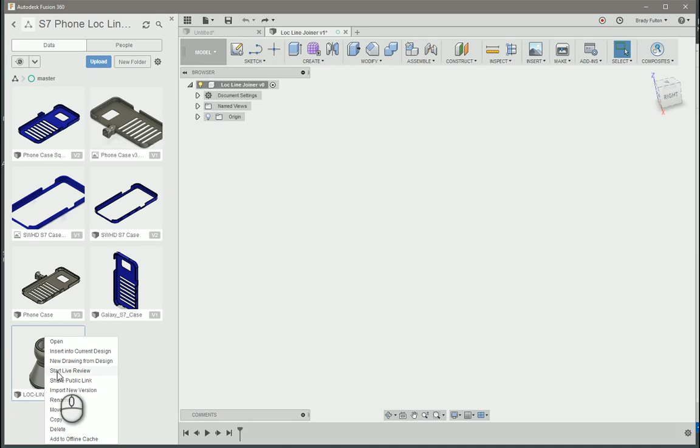Okay, so in here in Fusion 360, I downloaded a 1/4" LocLine from GrabCAD. I actually did it for this phone case originally, but we'll just drop that in there. And I've measured this previously, so I know it does match the dimensions of the actual LocLine.

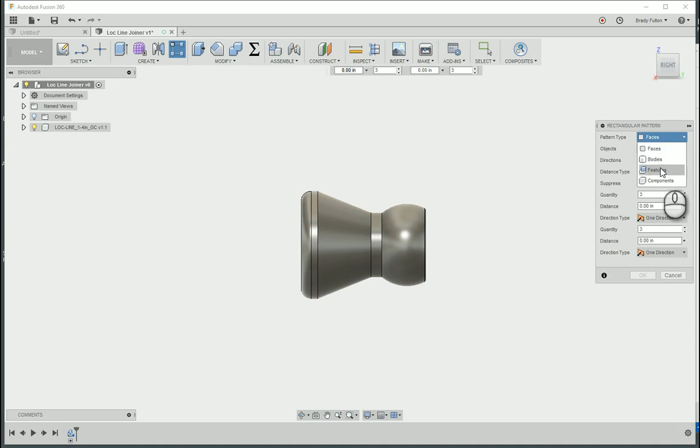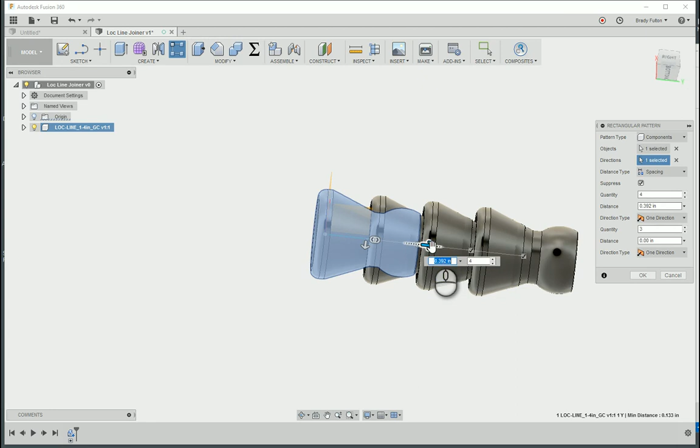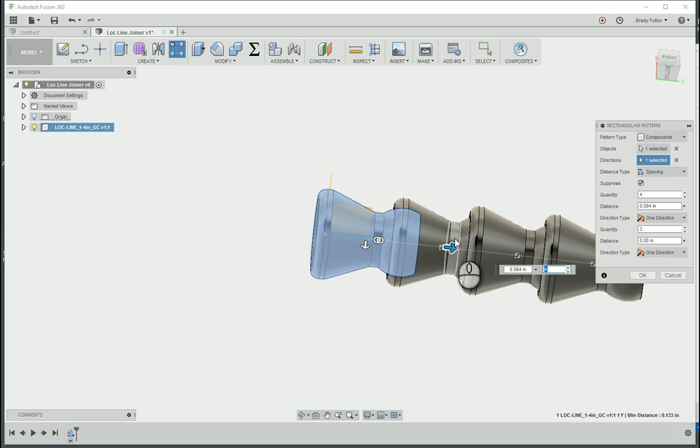So what I'm going to do is go ahead and actually create a pattern here, a component. Let's get my component, do it in that direction. How many do I want to make? Let's do 4, we'll do spacing. This part I'll just measure with my digital calipers, so from one to the other, 0.564. Okay, so we got 4 links there.

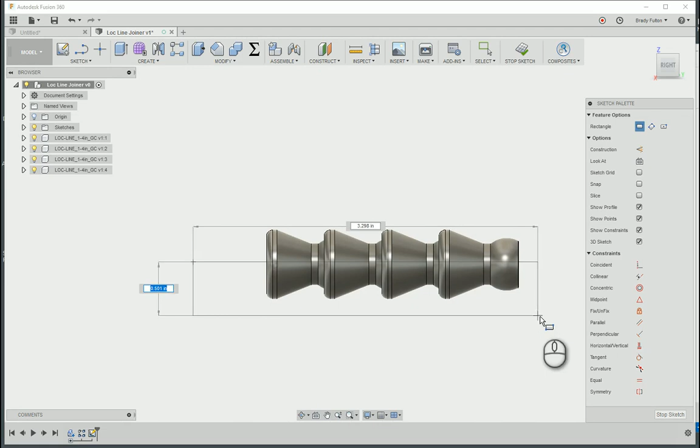Now I'm going to just create a block along the midline. Sketch this face, rectangle, line. I want it to stop here, so we'll project that one, and fully capture 2 behind it. So we'll go with that guy.

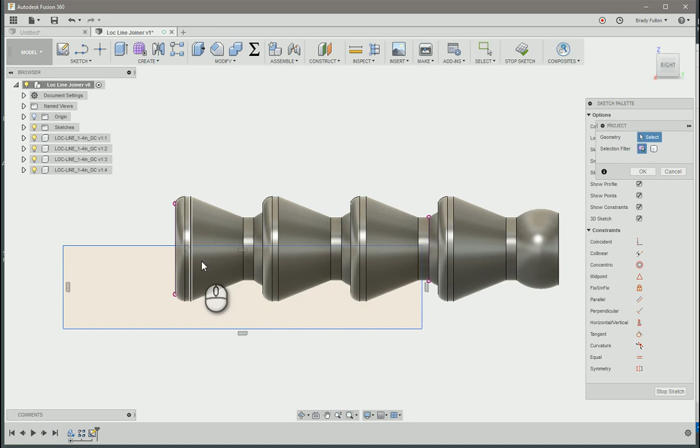And then do a coincident constraint from the origin to that. We are going to do a collinear constraint, that projected line to there, also this projected line to there, and then we'll dimension this leg, and we'll make it 0.75 for now. Let's do 0.5 for now.

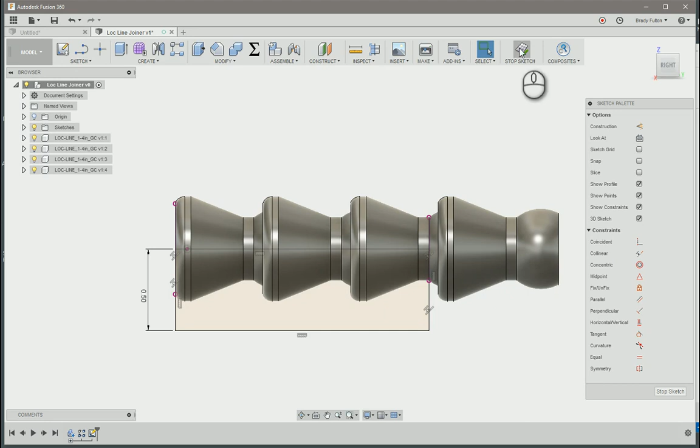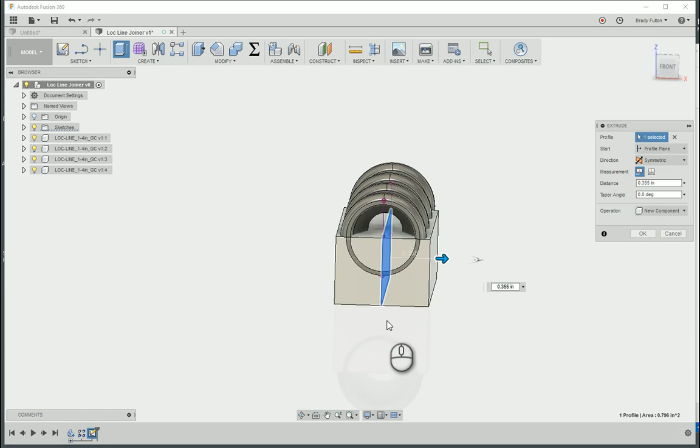Stop that sketch, I'm going to extrude that, go symmetric. Pull this guy out here, make a new component, make it 0.5.

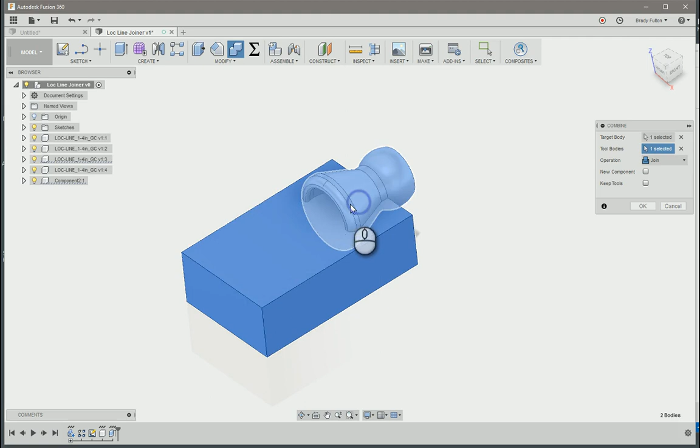Going to do a combine. I'm just going to remove this LocLine from these parts. So this is my target, these are all my tool bodies, and I'm going to cut. I'm going to keep the tools. Okay, I'm going to turn off all my LocLine now. Toggle this down, should have a couple bodies. This one, remove it.

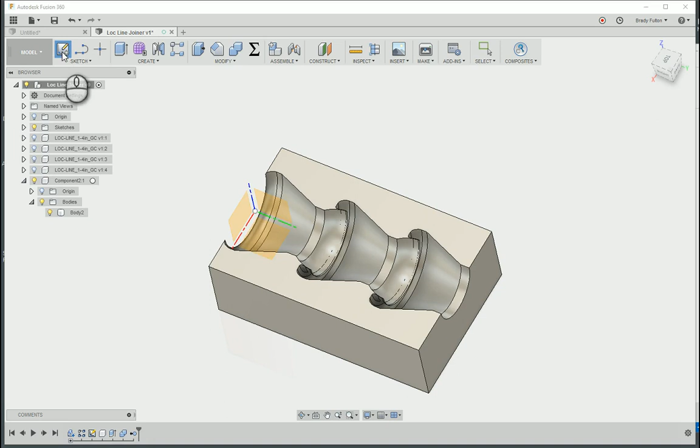What I'm going to do is, well, here's what I think I'm going to do. I think I'm going to do a sketch over here. I'll offset this, project, and offset minus 0.01. And then I think I'm going to revolve, stop sketch.

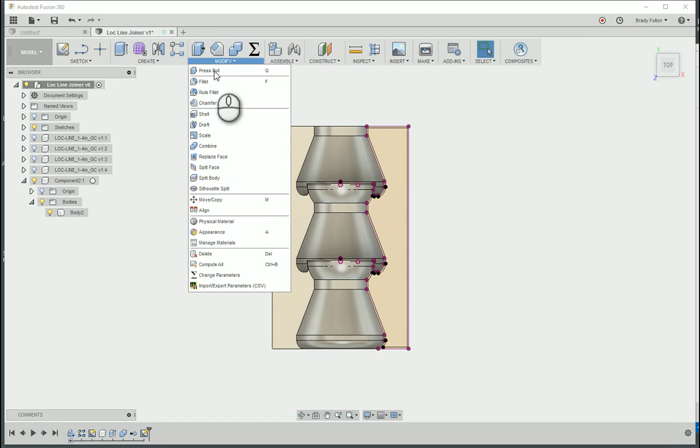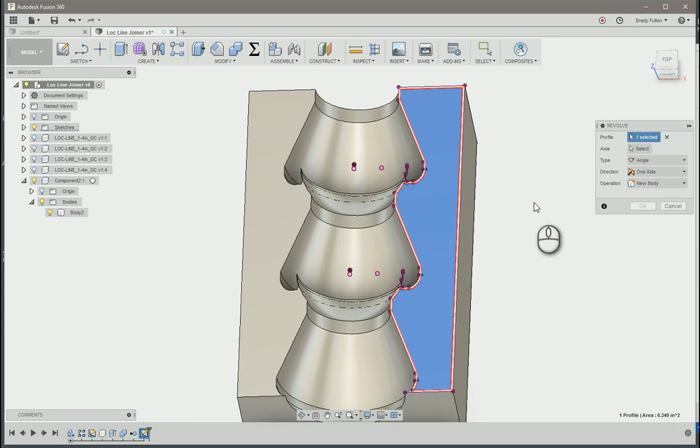Modify, do a revolve of that profile around that central axis. And I actually want to - what do I want to do? Do intersect.

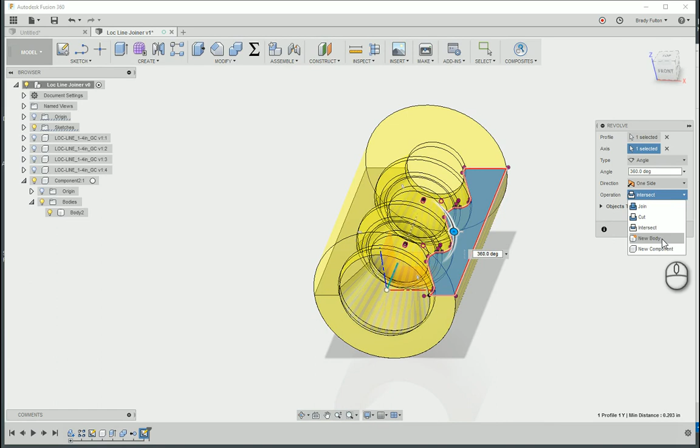I'm going to do a new body. Now I'll do a new component. Just going to do 180 degrees. Minus 180, new component. Okay, turn that off.

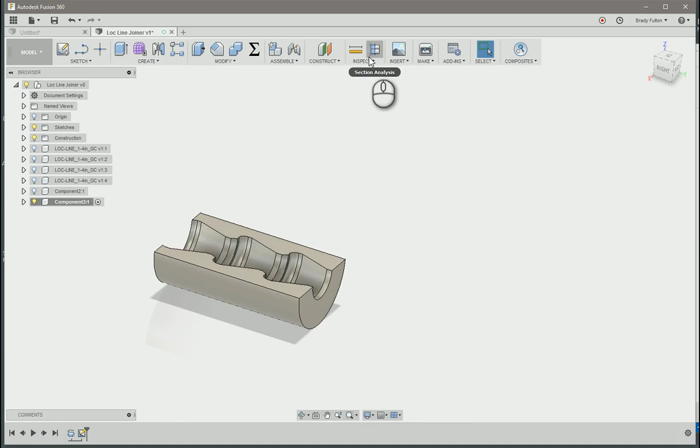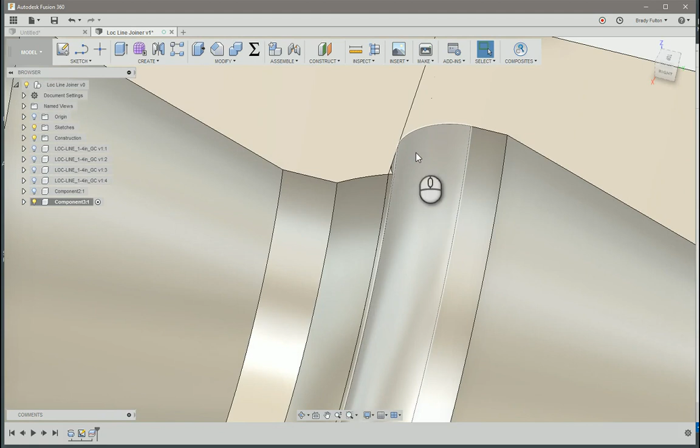Let's modify, let's split this body. Split this guy, splitting tool, right there. Okay, move this guy. So that's going to be where our joint is.

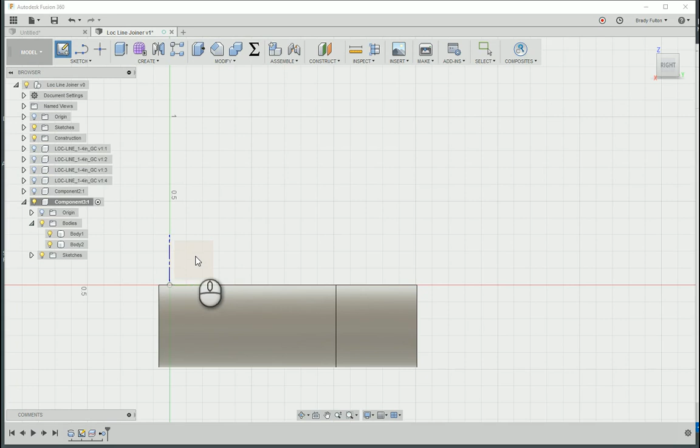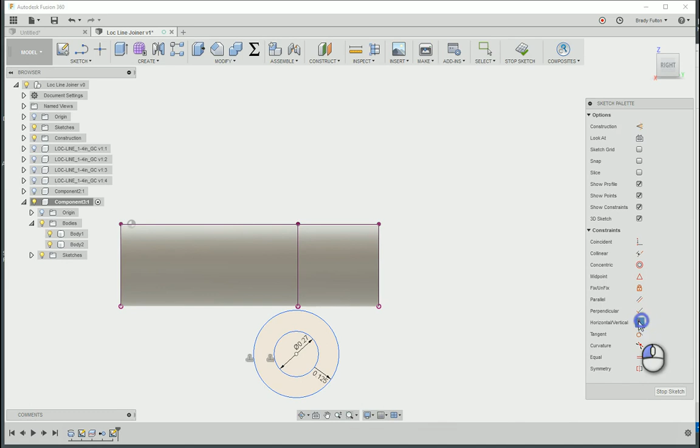We need to sketch that plane. C for circle, 0.27. Another one, just offset this, 0.125. Project. Horizontal, tangent. Interesting, good line.

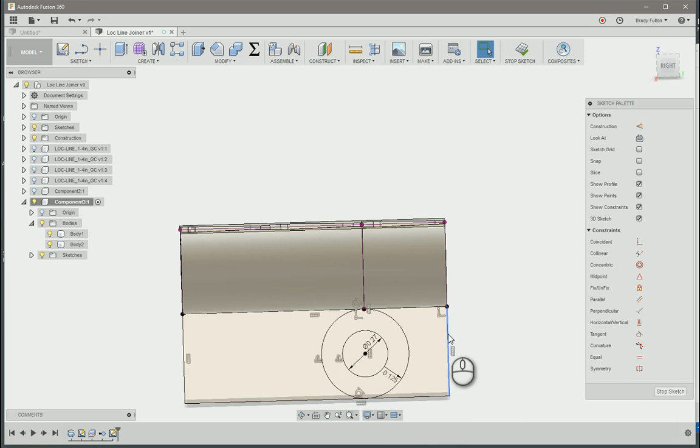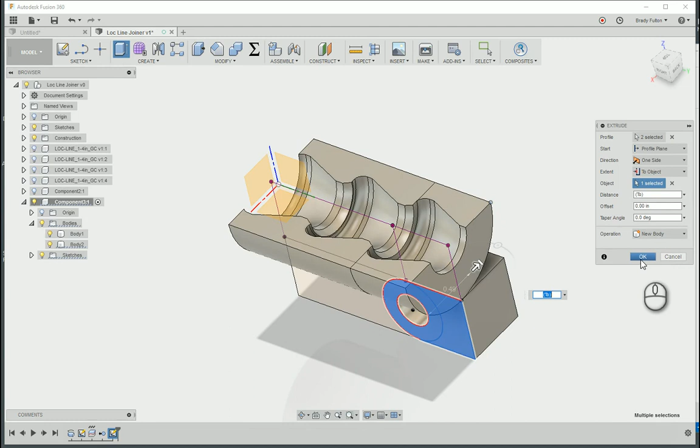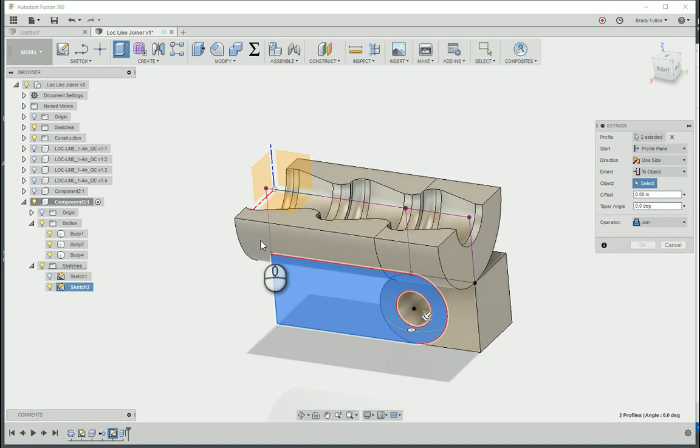That way to object. Turn that sketch back on. Extrude again, pull this one this time, and to object. New body. Okay, now we got 4 bodies.

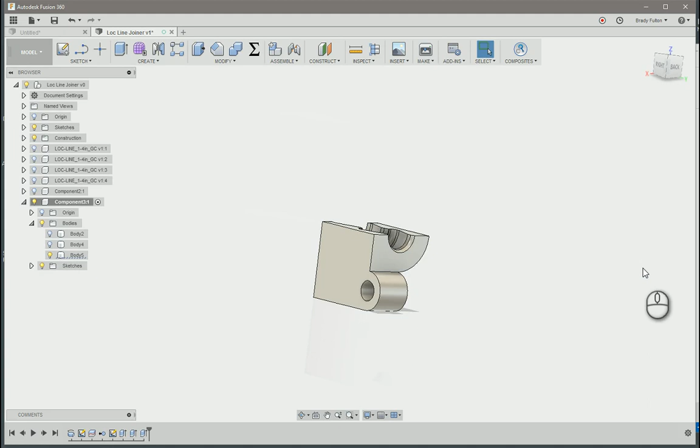To object, join, okay, to object. Okay, there we go. So now we've got our two bodies, we've got our pivot point. It looks pretty printable.

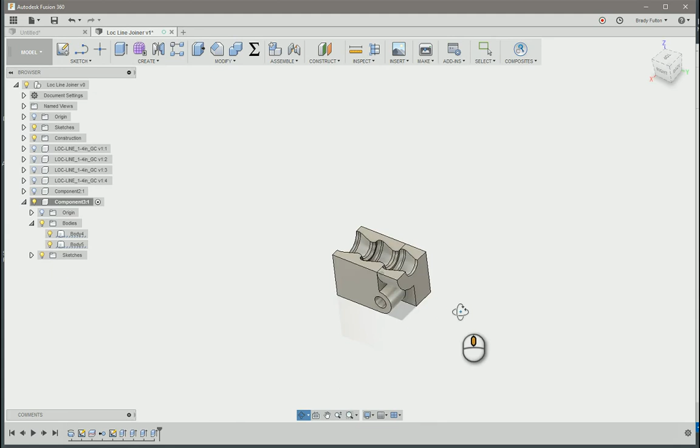Let's put a joint on here just so we can see how it's going to move, or ground. Since they're both bodies, we can't, but we can create a component from the body. Now we can ground this guy. And we can create a joint.

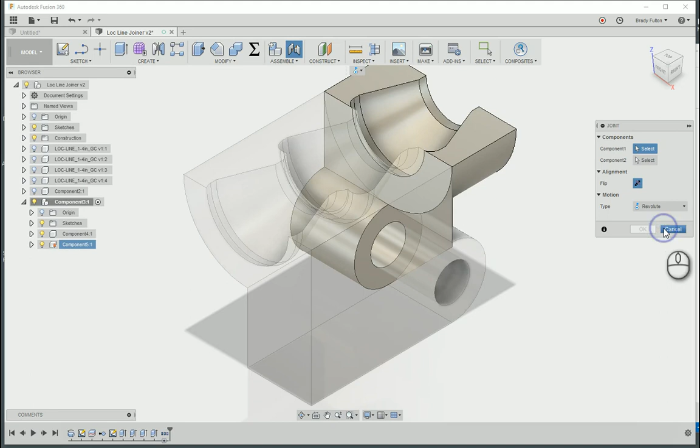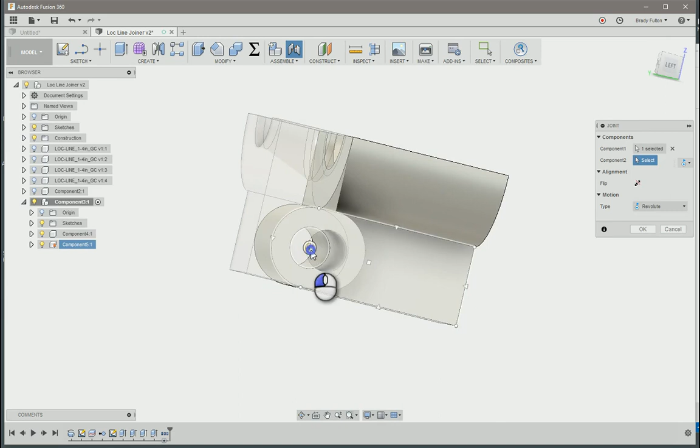A revolute joint between that and - flip the arrow around. Oops. Perfect. And there you go, hopefully that'll pop that guy on just like that.